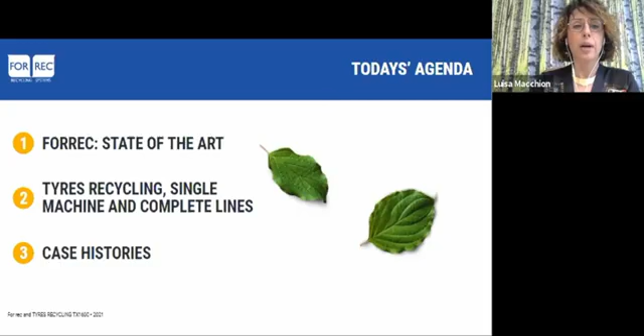Today's agenda will be a state of the art of the company. So we're not speaking only about who FORREC is, but exactly the point of our business, the state of the art. And then the reason why you are connected to this webinar is the tires recycling system. We will speak about our technology, our innovation, and our case histories, in order to give you a real and concrete idea of what we do and where. Now I leave the word to Mr. Zoccarato, who will speak about FORREC.

Before going through the interesting things and the technical part of the presentation, I would like to share with you the satisfaction concerning the growing of FORREC and the success of FORREC, despite, unfortunately, the COVID situation. This growing certifies that the philosophy that we apply on the market is the right way to achieve great targets.

As you know, we are a company absolutely customer-oriented. We pay great attention to after-sales service, and all our installations and machines are as unique as DNA strands. This means that we work and match our skill with the knowledge of the customer in order to make some kind of tailor-made project with the goal to realize the perfect system to solve the recycling issue that our customer has. I like to use a couple of letters, the R and the E.

Re as recycling, that is our core business and our mission. FORREC was born with the ambitious purpose to give new life to everyday produced scraps, with a hand to preserve the environment.

I would like to give you an overview of our main products because, of course, we produce complete systems, turnkey systems, tailor-made projects, but each plant is composed of different kinds of machines. We have about 60 different models in our range of products, starting from the 2-shaft shredder, going through the 4-shaft shredder.

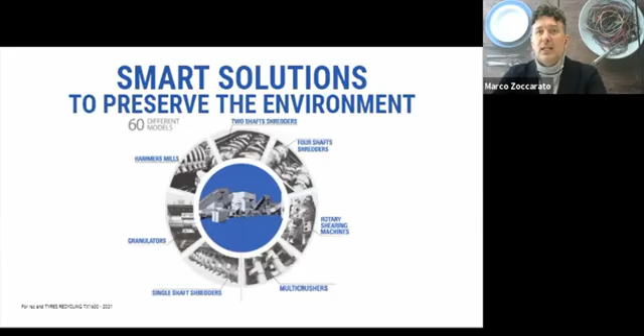Rotary shearing machine, a multi-crusher, mainly used in municipal solid waste, single shaft shredder, granulators, mainly for plastic recycling, compact arm hammer mill, dedicated overall to the metal scrap processing.

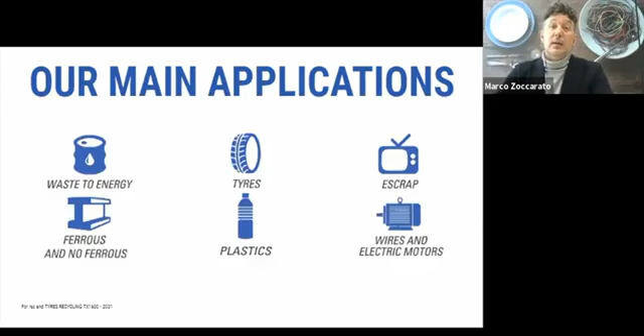So these machines are useful for different applications, for example waste to energy projects, tire recycling projects, scrap. And when we talk about scrap, we're referring to a very large sector in terms of electronics, starting from refrigerators, which are very high technology systems, household washing machines, going through dedicated systems for ferrous and non-ferrous treatment and processing. We are also involved in projects in plastics recycling, and also in copper wire and electric motors for copper recovery.

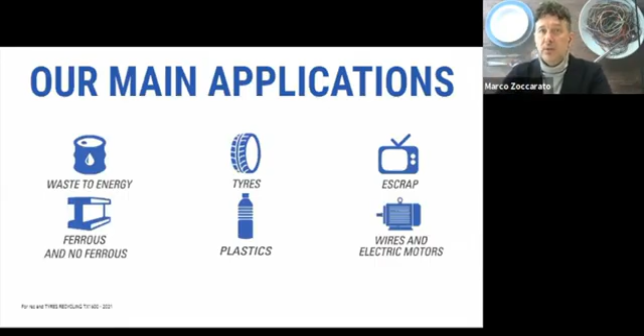So finally, just to summarize and go to the technical part, I'd like to share with you these 6 characteristics that say why FORREC: F as fidelity, O as openness, R as research and development, R as reply, E as environmental friendly, C as customized oriented.

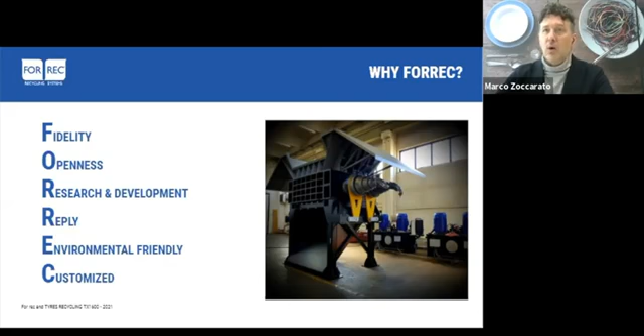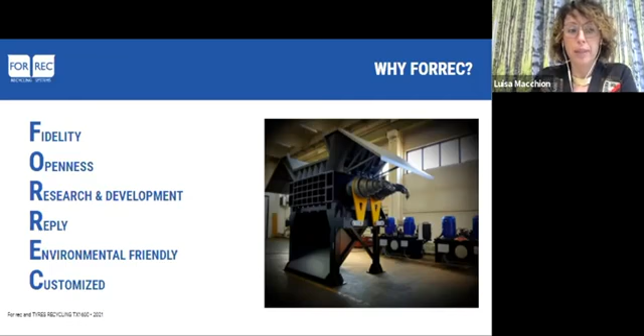So now we go on with the reason for this webinar, which is the tires recycling system. As Marco informed you, FORREC is a manufacturer of single machines and also complete installations for the treatment of tires. But to start speaking of tires, we would like to define which kind of tires we are speaking about. The most common scraps are car tires, truck, and pre-cut dumper truck tires.

When a tire no longer has the indispensable characteristics for safe and efficient performance on a vehicle, even through retreading, it becomes out of use. So it becomes waste. It must therefore be collected for recovery and recycling, which takes place in special plants. The rubber from which the tire is made up is a mixture of very high quality polymers with exceptional chemical and physical characteristics that remain unaltered even in the recycled rubber obtained from it.

So end-of-life tires can be sent towards 2 alternative options: first, recycling, from which new materials such as rubber, steel, and textile fibers are obtained, or recovery as energy in ad hoc plants, mainly cement factories. ELT, which means end-of-life tires, have a calorific power equal to that of coal, but with much lower climate-altering emissions. For material recycling, the ELT are sent to special plants that, through mechanical grinding, reduce them into smaller and smaller fragments until the 3 components of the tires are separated: rubber, steel, and textile fibers.

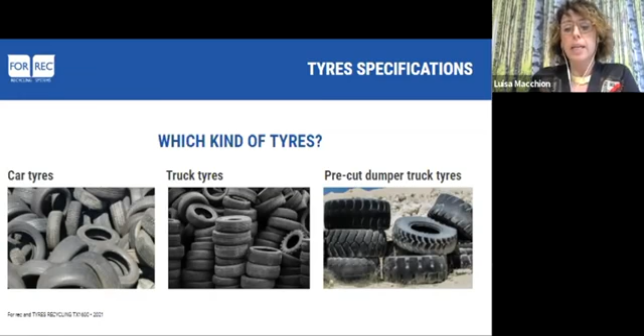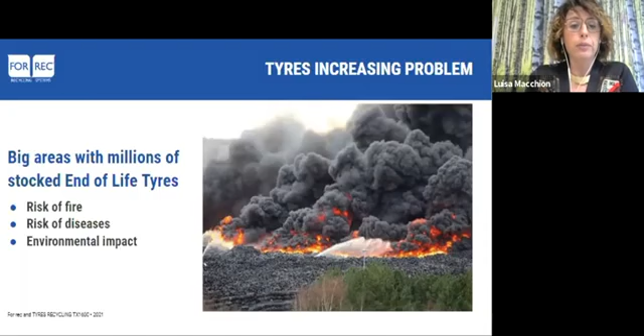So the treatment of end-of-life tires has always been a problem for all areas in the world, from the most industrialized areas, where the presence of many vehicles causes a large quantity of waste, to the most remote areas, where unfortunately this type of hazardous waste is stored in vast abandoned areas with harmful consequences for the environment. As you can see in this picture, often this waste causes fires. This also has important consequences for the health of people, because such an area is an ideal environment for the proliferation of diseases and pests.

So now let's speak about FORREC projects and FORREC and the treatment of end-of-life tires. FORREC, as we told you, produces single machines and complete systems for the treatment of any type of solid, urban and industrial waste, and for almost 15 years has been present on the market with reliable and effective solutions. FORREC's complete system allows you to obtain rubber granules with a size between 0.8 and 4 millimeters.

And with this recycled rubber, innovative and eco-sustainable products are made. These products find application in sectors that are very different one from the other, from products for the building industry, such as acoustic insulation and vibration damping, to sports with playgrounds, soccer pitches, multi-purpose sports flooring, and products for animal welfare, for instance.

There is also the sector of roads and infrastructures, where alongside modified silent and durable asphalts, we find cycle paths, street furniture, and elements for road safety. So the panorama is completed also by design products, some objects and new compounds made by combining recycled rubber and thermoplastic materials. Various treatment lines of this type have been installed by FORREC in different areas of the world and are currently operational.

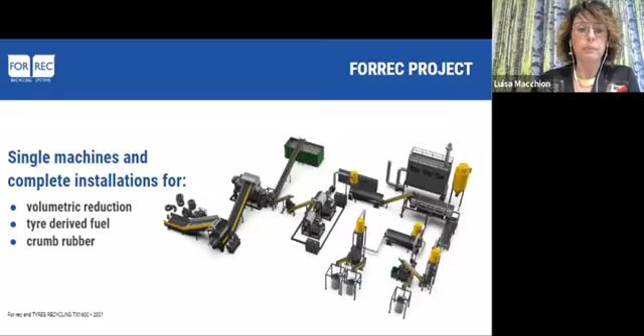So the energy recovery of ELT is a fundamental component for ensuring 100% of the virtuous cycle of ELT recovery. This process starts with a volume reduction.

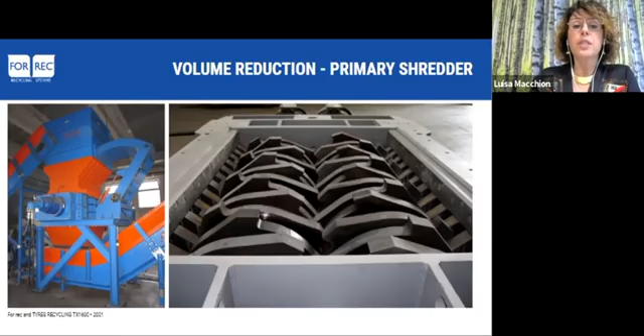The FORREC primary shredder is the right machine for this. It is an efficient and robust industrial counter-rotating shredder designed for effective performance during treatment involving a reduction in volume and shredding of materials with partial control of output size. This is designed to achieve high torque, and the machine operates with low RPM, featuring very low consumption. The shredder blades are made of special steel, sometimes with screw cutting sectors, ensuring long life cycle and reduced maintenance.

So the term TDF, Tyre Derived Fuel, is used to indicate tire fuel. The energy recovery from ELT, end-of-life tires, derived materials, is mainly carried out in cement factories whose high operating temperatures ensure compliance with emission limits and allow making the most of the high calorific value of rubber, which is comparable to that of pet coke.

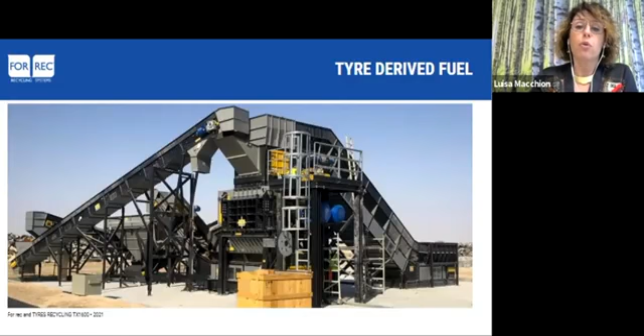Moreover, this process allows recovery of combustion residues, ashes and steel, as materials which are incorporated into the finished product, thus avoiding the use of further virgin raw materials, with environmental and economic benefits for companies and also for the community.

In order to obtain a very good tire-derived fuel, FORREC has designed, projected, produced, and also installed, and now is operative, the new TX 1600.

Speaking of WTE, waste to energy, the most delicate phase is that of primary shredding of the product for TDF. This treatment requires that the output product be of well-defined dimensions, with the characteristic of a clean cut and not frayed.

Considering the importance of this waste, FORREC has developed the TX 1600 shredder with the aim of meeting the specific requirements of this market segment, without neglecting productivity while keeping an eye on the relationship with production costs.

So now we have here a data point, which is the dimension of the output material, from 50 to 80 millimeters.

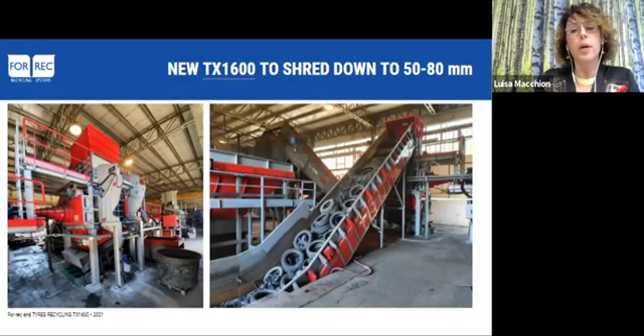There's an easy way to replace the cutting plate. There are cutting plates and not single blades. There are some guiding shafts on the cutting chamber, which help the tires enter the cutting area.

The input capacity is up to 8 tons per hour, and this is a very great result that we achieved. The output dimension, as I told you, is from 50 to 80 millimeters. And as we said before, this is the perfect product for cement factories.

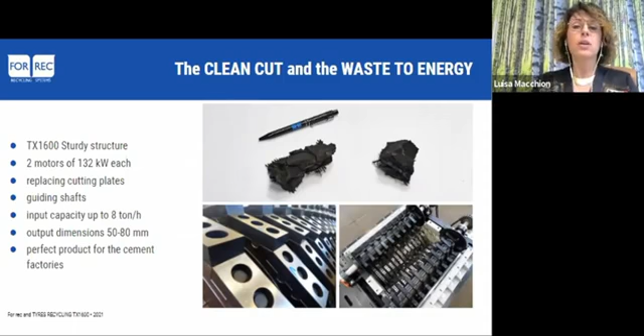So the machine has been specifically designed for the so-called clean cut, which means a shredded material with a defined dimension and without frayed steel wire. This frayed steel wire causes real difficulties processing the scrap inside the cement furnace. That's why the clean cut is a great goal that we achieved with this machine.

So here is a short video for the line we have recently installed in Abu Dhabi. The customer was interested in getting a clean cut material, so please take a look at the video.

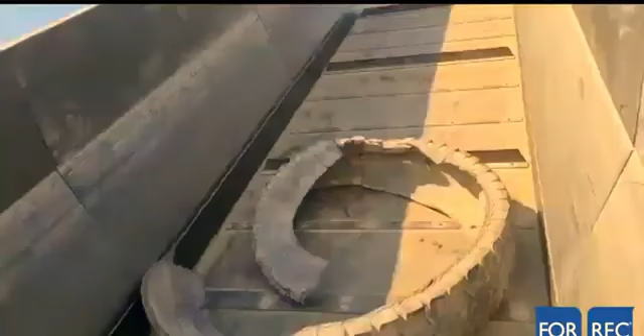The line continues with the granulation. So we use a faster turning milling machine with a sieve in order to obtain a crumb rubber of dimension inferior to 4 millimeters. The process does not end with the shredding, of course, but we have designed a system to collect all the dusts and textile left during the process. So different points for the separation of the metal fraction and the final collection of secondary raw material.

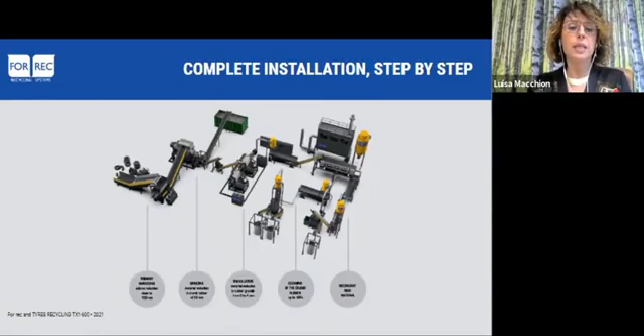This installation is an example. Of course, this is a system to process 3 tons per hour. But Forrec, as we said before, used to tailor-make these machines and installations according to customer requests. So this is one example, but we have complete installations, for instance, for the treatment of tires to process 2, 3, 5, 6 tons per hour. So we do not fix a limit to our potentialities.